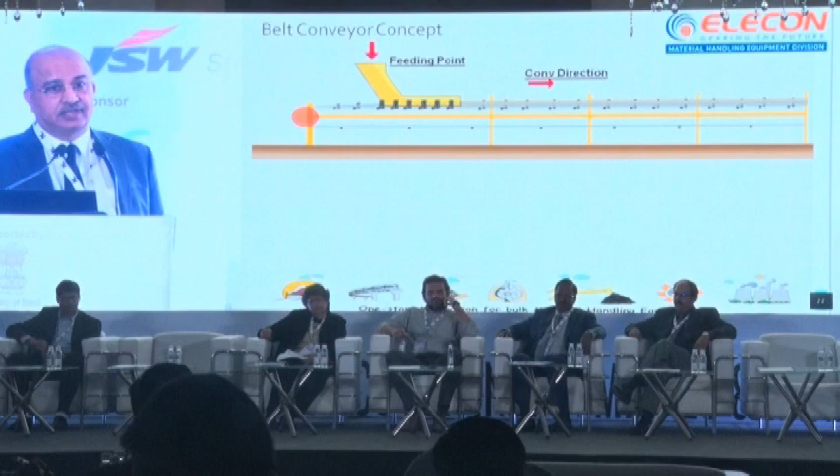This is how it works. A pipe conveyor, conceptually - as it starts, it's actually a flat conveyor where the feeding point is a little further ahead, and then as it moves, the conveyor changes shape.

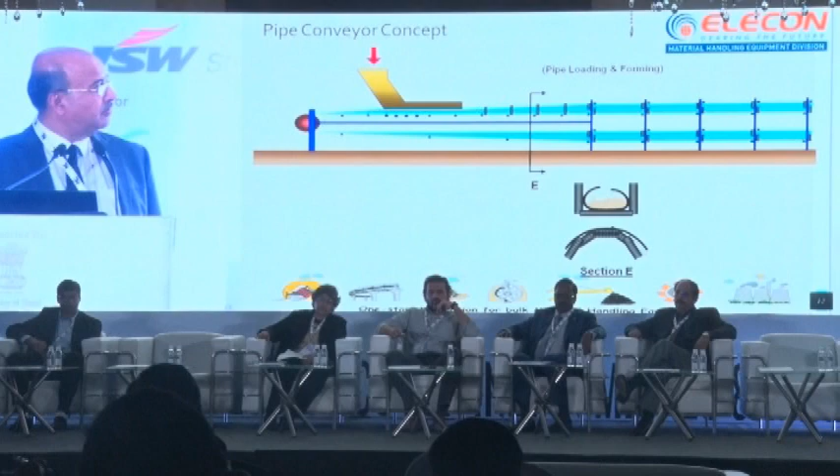This is the conveying direction. As we begin, it's a simple trough in section E. We move forward, it starts closing, then takes a U shape, followed by slow conversion into a pipe, which is completely closed. And it has a lot of advantages.

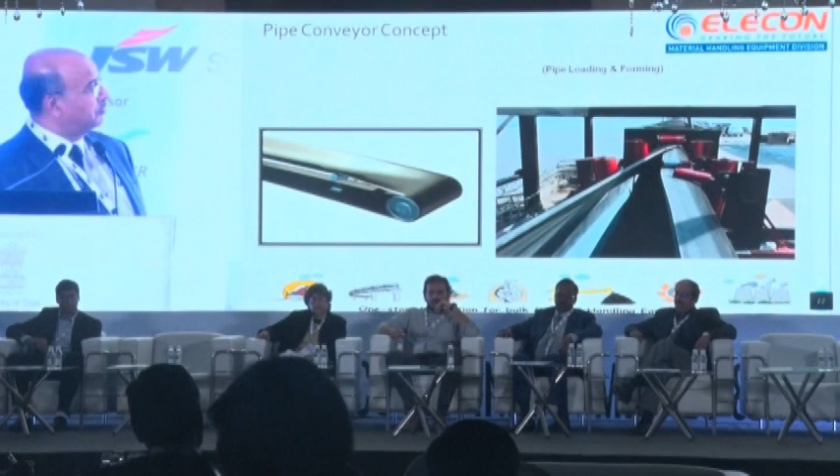This is one picture which shows how it actually happens in the field. The picture on the right shows that it starts as a trough conveyor and then gets converted into a pipe conveyor.

Some of the big benefits of closed conveyors is environment friendly. It's completely enclosed, so there is no contamination either from outside or nothing falls out of it. Long distance conveying benefits a lot with this closed conveyor.

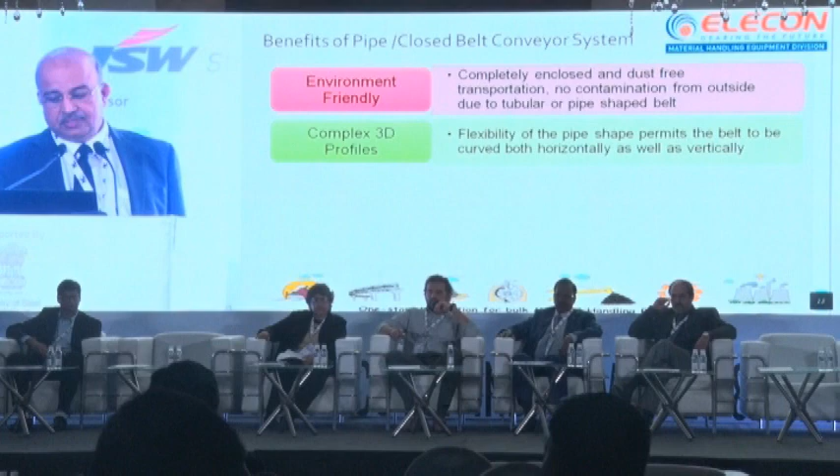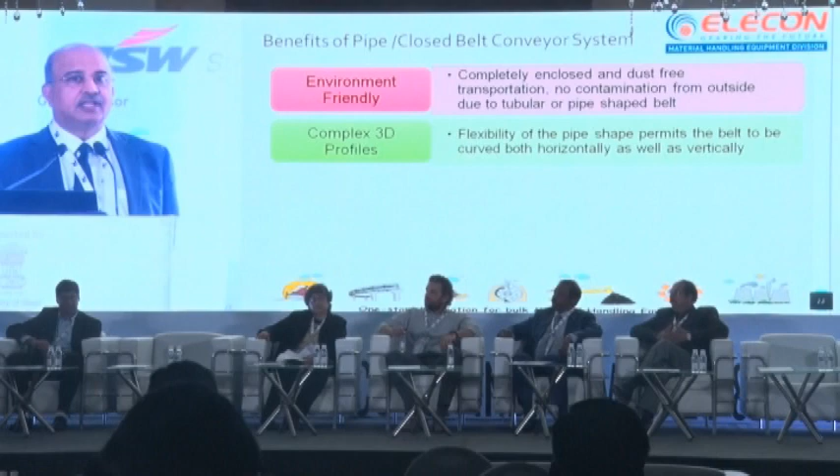The pipe is very flexible, so it allows you to move left or right, vertical, up or down. So the conveying becomes very flexible, and there is no need to have transfer points which always lead to environmental hazards. It requires DSD systems at many points, that is removal of air at many points, which is totally avoided because it's a closed conveyor.

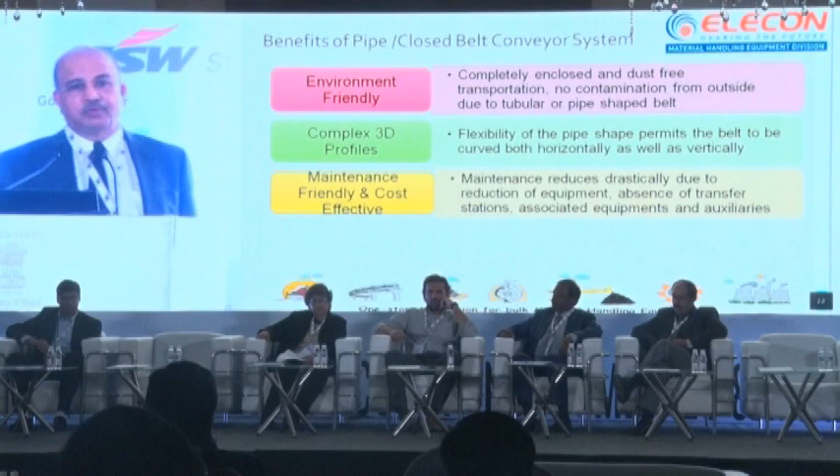It's maintenance friendly, and it doesn't really require much maintenance, except some of the pulleys which may wear out, or the belt may have a little rough cut here and there because of misalignment, but only minor things happen.

It has also got a feature that when the belt returns after being converted into a pipe, it discharges things, and then when it returns, it can be used as a return conveying system that also can carry some material along with it. So it has double benefits, moving in both directions, it can convey material.

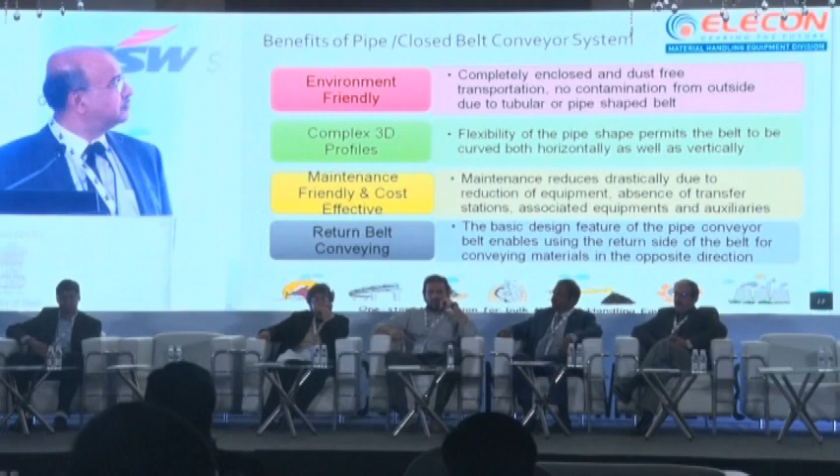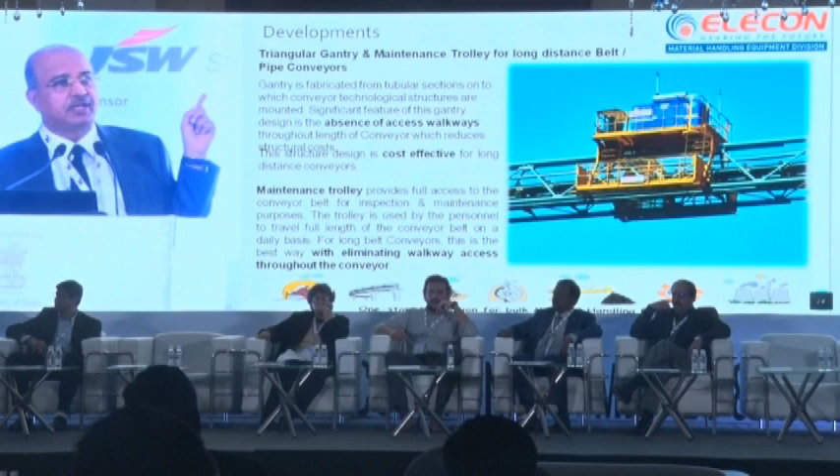For NMDC Donimalai plant, we have supplied one which travels 4.5 kilometers one way. So this is an innovative solution we have provided, which is very much available. It's a special product for us.

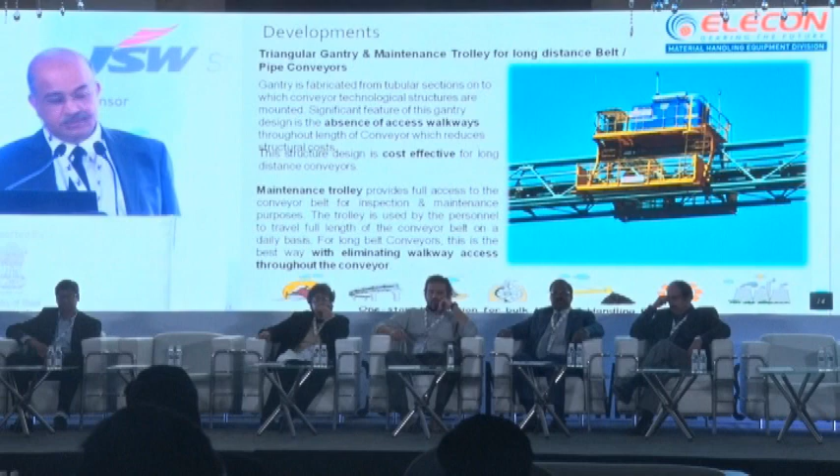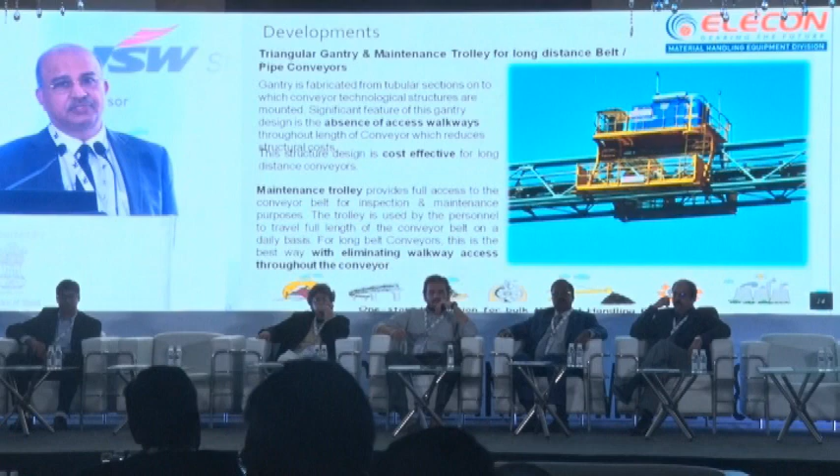So you have access to the full length of the pipeline. At the same time, there is no platform, so you save on structures, you save on walkways, you save on space, apart from being environment friendly.

Another view of - we have also made some wine glass conveyors, which are special shaped conveyors, in one of the plants in Gujarat. It again provides that trough which helps in containing the material within, and there is no spillage.

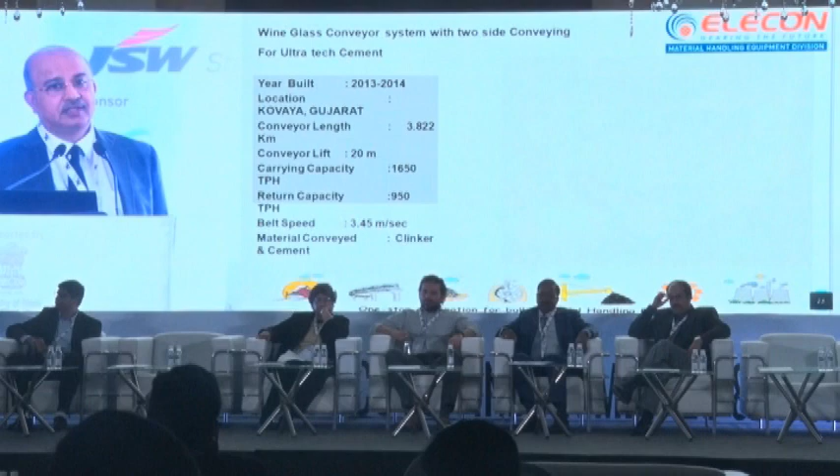This is another pipe conveyor which we have done for Aditya Birla Cement. These are some of the major projects we have done which have been successfully running for many, many years.

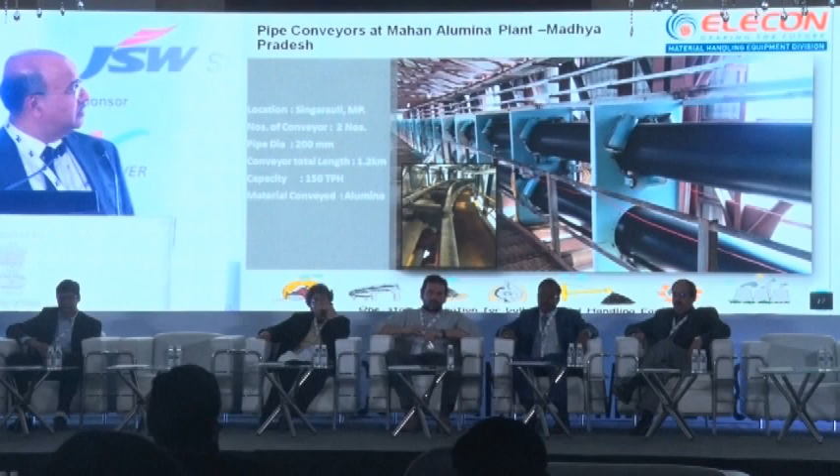This is a closer look at the pipe conveyor which we have put in Mahan Alumina plant in Madhya Pradesh. It has been working successfully for the last several years.

This is Manikgarh Cement. Conveyor length is 7.8 kilometers and quite a high capacity of 1500 tons per hour.

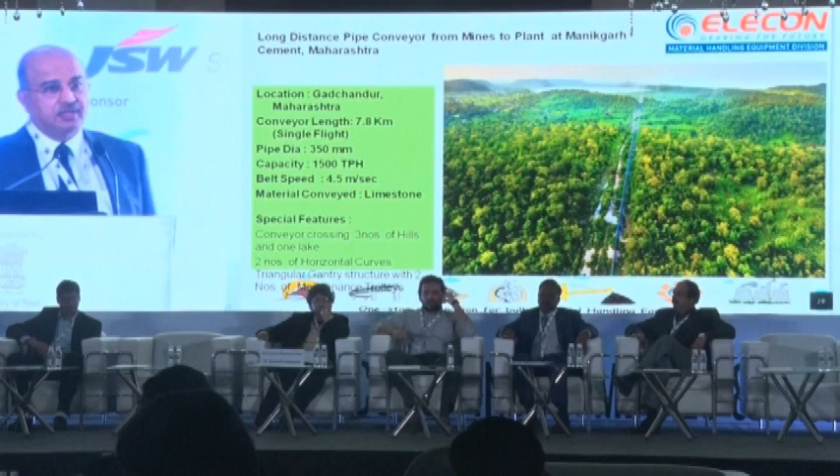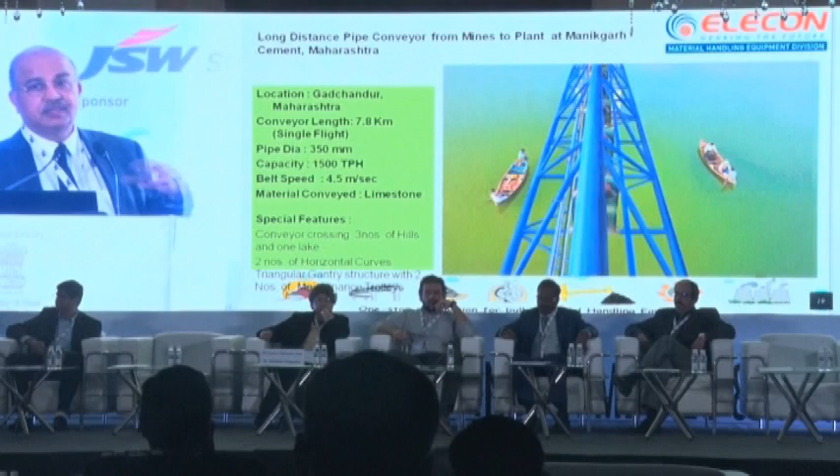This is one which I was thinking about when we were talking about environment friendly conveying systems. This passes through a forest. It also crosses a water body, but it has been permitted by the ministries to take the material above this. This is for a cement plant which uses limestone. So these are some of the things we can do to save the environment, at the same time convey the material long distances.

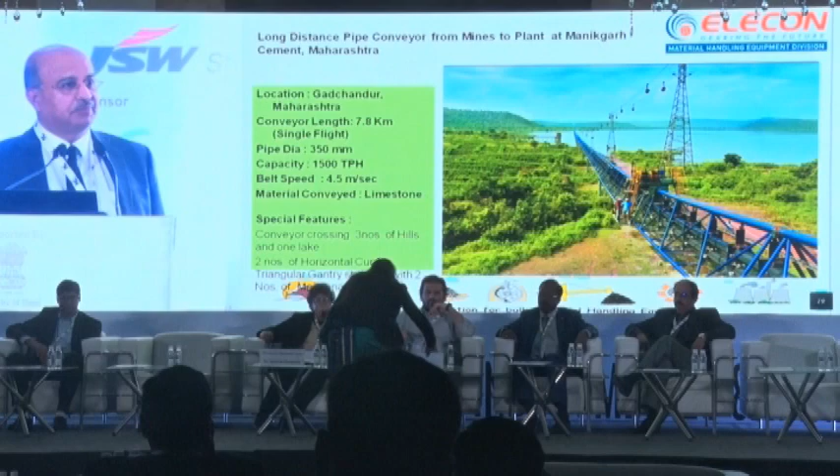So here we are, as Elecon, we have a manufacturing facility which maintains the quality and high standards of design. We are the market leaders among several others.

So that's all I had to convey. Thank you.